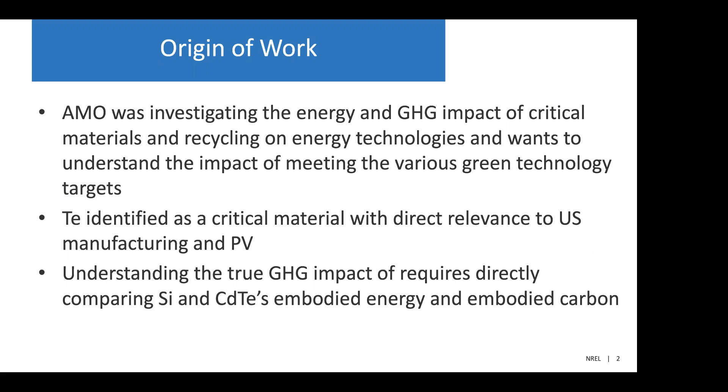And so that's kind of the basis of where we got started and the lens we were doing this in. And as we like to say, this makes a really good marriage between analysis and science.

All right, I already was throwing out some different vocabulary, and I have to confess, most of my work is focused on embodied energy, embodied carbon. So I was like, of course everybody knows what this is. Turns out, for those of you who do not live and breathe this, it is not necessarily intuitive.

So embodied energy is the energy consumed to mine or harvest all the way back from raw materials to a finished product. This includes things like transportation. Same with embodied carbon. Embodied carbon is the CO2 released starting all the way back at the mining of the raw materials through the transportation of a finished product.

Now, when you're talking about these things, you are often talking about analysis called LCA, life cycle analysis. And you will either do that from cradle to gate. Cradle to gate is from mining extraction to the end of the manufacturing of that product. The other way the analysis is often done is cradle to grave.

Going cradle to grave means you start at the mining or the extraction and you go all the way till the end of the life of the product, and that product has been disposed of, recycled, or found a second use. For what we're going to do, it's going to be cradle to gate, but that just sets the parameters of how we're looking at this.

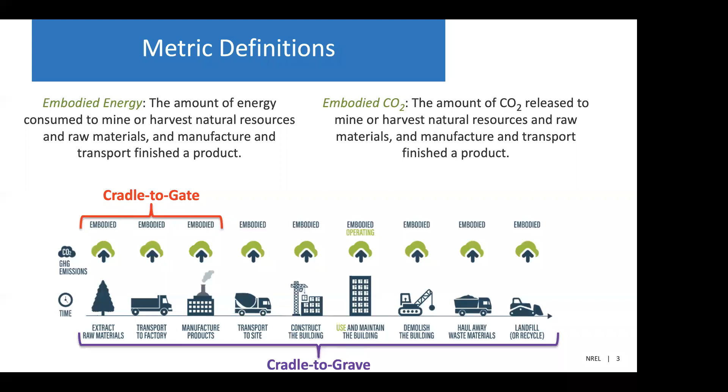Continuing to give a little bit more background. So the tool that we're going to use to do this life cycle analysis for our project is called Material Flows through Industry Tool. This is a tool that the Advanced Manufacturing Office has been funding for over a decade. And it is based, if you're just doing the defaults, on the U.S.

Energy Grid averages. And you essentially put a recipe for whatever you're wanting to manufacture into it, and it can then generate what is the embodied energy or embodied carbon to manufacture that recipe. And it has a big database behind it. And that is the tool we are using for our calculations.

Then, just to iterate for this group, it is a free tool that you can use. The current administration focus, and a lot of the new funding opportunities coming out, are starting to talk a lot more about decarbonization, embodied energy, and whatnot.

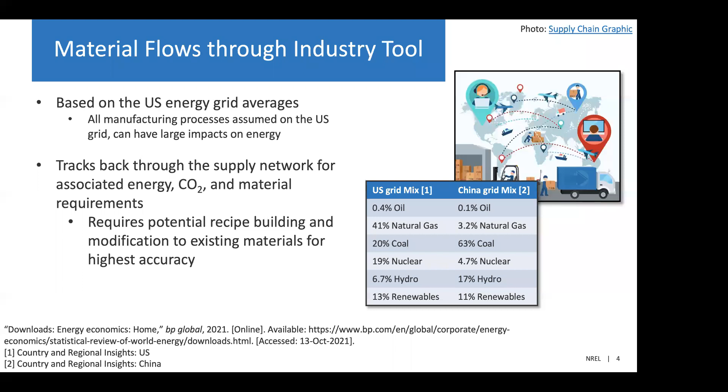So this is actually a tool. You can Google MFI NREL. It'll take you to the website. You can sign up. And this is a tool you can use for your own projects if you want to be able to get an idea of what these are.

All right. So going a little bit more to what was the project, we decided to use as our model cases silicon PV and CdTe PV. And so we consulted with different experts to get an idea of what is the current state of the art. We thought that CdTe makes a really good approximation for almost all thin film PV, as it's a superstrate technology grown on glass with a TCO.

So since today we're talking to people who are interested in perovskites, while obviously there are differences between CdTe and perovskite, for the purposes of this analysis there should be a pretty close approximation of what the embodied energy and embodied carbon, initially at least, would look like.

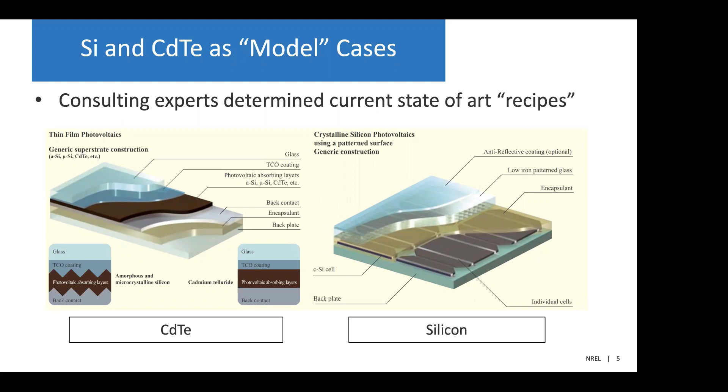All right, so how did we get going on this? Our first step was to do a fairly comprehensive literature search, pulling values that other people had done, because it's not like we reinvented a wheel and nobody had done a life cycle analysis before. And so we wanted to make sure that whatever we were doing was in line with what had been previously reported. So we, for both CdTe and silicon, pulled the literature values.

And then we went and got the latest recipe. For CdTe, it was the latest design from First Solar for their Series 6 module. And then for the silicon, we got a bifacial recipe from a Key State lab, and in analyzing it, we think it's a close approximation to the state-of-the-art LONGi module.

So once we have that, we put it into MFI. And when I say we, I actually mean Hope. Hope did all the LCA analysis for all of this. And so this is the royal we. And then we looked at our values compared to what we were seeing in literature, and that's what you're seeing here.

And again, I'm going to highlight we were doing cradle to gate, so we only looked through the finished manufactured product. And you can see, obviously, our values are a little bit lower than some of what was in the literature, but we are also at least 3 years newer, so we're using more state-of-the-art, and a lot of things have changed. There's been a lot of material reductions and other things.

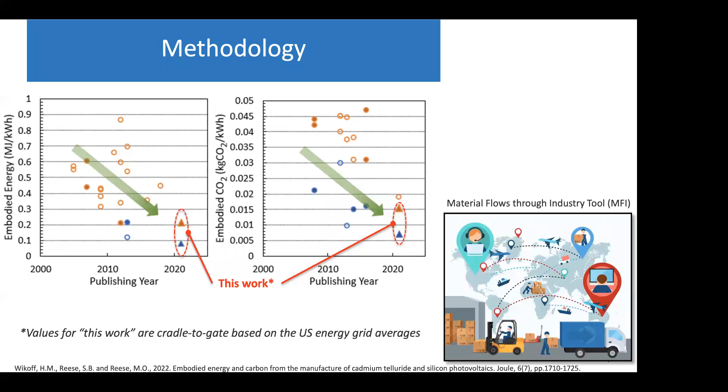So we felt fairly confident that we were starting at a baseline where there was nothing crazy that we were doing. We were confident in our tool, confident in our recipes. And so starting from that standpoint, we ran the numbers. All right, so energy payback times. It turns out one of the things we found when we were looking through literature, energy payback time is a favorite way of comparing technologies. And so we wanted to figure out the energy payback for a CdTe module versus a silicon module.

Now, I want to take a moment and caveat this. We understand energy payback times are more typically for a system. In our case, though, what we did is we just modified, and this is the energy payback time to manufacture that module. But we do understand typically this is more of a system sort of equation. But if you read through a lot of different papers, a lot of people report on an energy payback time of modules alone.

So what we found is that energy payback time of a CdTe module is about 2.5 months. What does this mean? That means that you make this module, you get it out in the field, and after the first 2.5 months, it has generated the energy that had been necessary and consumed in order to manufacture it. That means for the next 29 years, 8 months, and 15 days, all the energy it generates is in excess of what it had taken to manufacture it. A silicon module took closer to about 6 1/3 months to have an energy payback.

One of the things that we were surprised to see is the semiconductor for a CdTe module is only about 1/3% of the embodied energy, whereas if you look over here at the silicon, it is closer to 5 months. And I'm actually going to turn it over here to Matt to talk a little bit more about some of the other technical things we came across here.

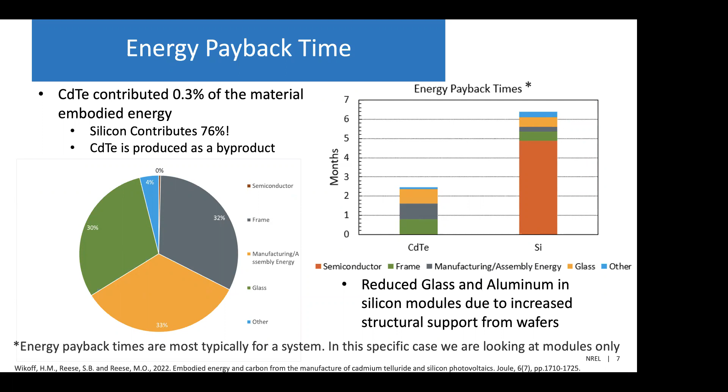So, yeah, as Matt noted, in a thin film module, a third of your energy is the glass and a third of your energy is in the frame. So from a perspective of potentially decarbonizing a thin film, there are a lot of other areas that are going to be just as impactful as tackling the module manufacturing itself.

All right, so going back to what the project's original mandate was, we wanted to then look at recycling. Now, first, I know there is a lot of excitement about recycling PV modules out there, and I share it, and I think this will be great.

Nevertheless, the question actually came down to, is it reasonable to recycle CdTe modules in order to recover the cadmium and the tellurium as a critical material and reuse it into another module? And using the same methodology I described, we were able to ascertain that if the only thing you recovered from a recycled module was that cadmium telluride, you would only have a minimal bump in the amount of energy it took to manufacture that module.

Now, however, if you've already collected the module to recycle it, it's super trivial for you to go ahead and strip that aluminum frame and recycle the aluminum. And so if, in addition to cadmium and the tellurium, you go ahead and recycle that aluminum frame, then you actually are going to use considerably less energy than it took to make it out of all primary materials.

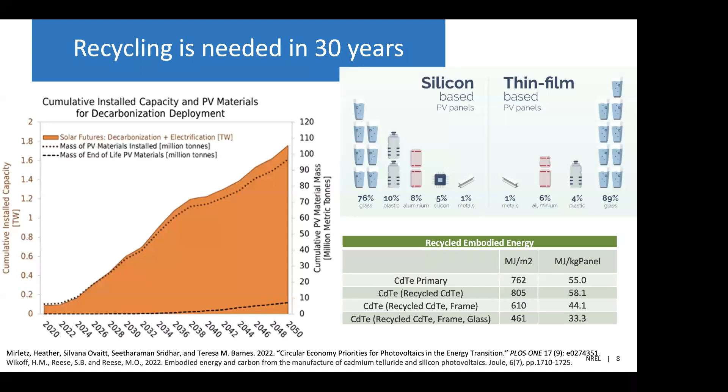So going back to that energy payback, we had been able to get a couple other ideas of what the amount of energy to manufacture a CdTe module would be. Same with silicon. The energy to recover the aluminum frame of a silicon module or the glass of silicon is going to be the same. We then wanted to look at the energy payback as you are able to use more and more recycled materials.

Something we learned, and it was kind of eye-opening to us, is that in the way energy payback is defined to be calculated, you actually put in a grid efficiency, which is the primary energy to electricity conversion on the demand side. And so this counterintuitively means that as the grid goes to a higher renewable penetration, the energy payback calculation will mean that it'll take longer for these renewable technologies to pay back.

So currently we're in the upper left-hand corner with CdTe, and as we come down to using all recycled material, but the grid efficiency goes closer to more renewables, the energy payback time will be somewhere between about a month to upwards of 5 months if we had a 100% efficient grid, which was never going to be possible, but we will get closer. Matt, anything on energy payback you want to tackle here?

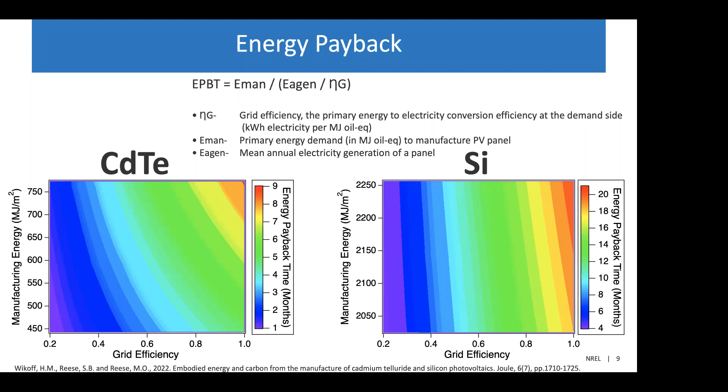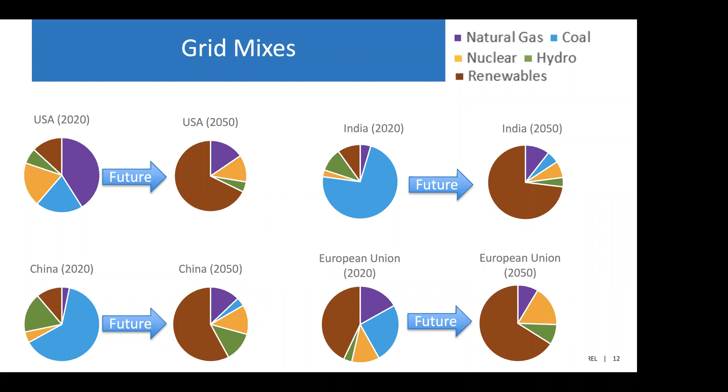All right, so using these grid mixes, we went ahead and ran the same analysis that we showed before, looking, though, at the manufacture of these technologies at each of these locations. So manufacturing CdTe in Europe, US, China, India, same with silicon. And as you can see, the difference between CdTe and silicon is about 2x lower when you have the same mix, and the mix can then change each of those amounts by about another factor of 2x.

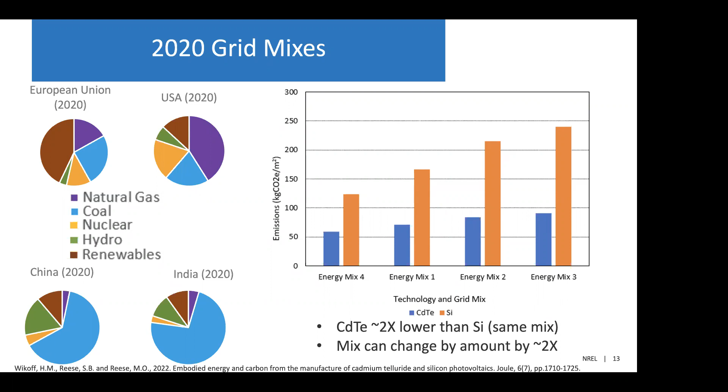Okay. So I started off our talk today talking about all this embodied carbon. I'm sure all of you have been hearing about embodied carbon, but why do we care? As we were bantering back and forth, Hope came to us with the results and said, look, it takes this much carbon to make a CdTe module. All right, great. But now, what does that mean? What is this amount of carbon? And so, where do these carbons come from? It's based on the carbon budget.

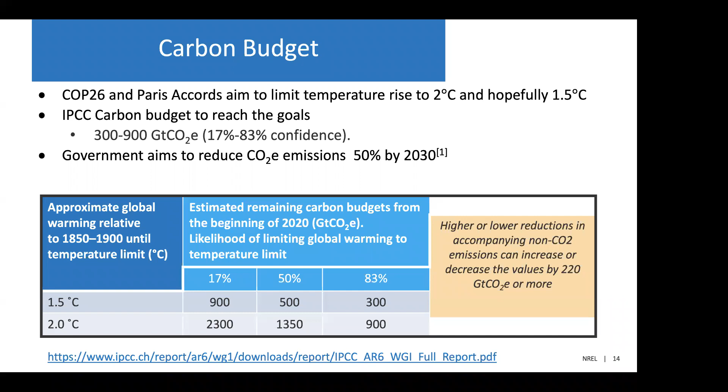With COP26 having been recently, the Paris Accords, the goal is to limit a temperature rise to 2 degrees C. Ideally, in a happy world, we'd keep it to 1.5 degrees C. And so the IPCC has a carbon budget with confidence levels that this will actually happen. The IPCC has calculated with 50% confidence that if, starting at the beginning of 2020, we only generated another 500 gigatons of embodied carbon, we would be able to limit the temperature rise to only 1.5 C. So what we want to do is take the values we calculated for each of these panels and put them in a, okay, what does this mean sort of analysis. And that's what we've done here.

So what does it mean to manufacture 1 terawatt of the PV technology on these different grids? What you can see here is manufacturing a terawatt of silicon on India's grid in 2020 would result in generating 0.1% of the 2 C IPCC 50% confidence budget. However, when you go to what their 2050 grid would be, you are instead going to be at 0.1% of the 1.5 degree IPCC budget.

Also, again, going to the what does this all mean? Because as we were staring at these numbers, we're like, okay, what is that in relation to? If you look at the very top of this graphic, the green line is the emissions from 2019 US electricity generation. So the good news is a terawatt of PV manufactured on any grid is still less emissions than what we had in 2019 to generate our electricity. However, as you see in the EU, in 2050, manufacturing either a terawatt of silicon or a terawatt of CdTe puts you under the 0.1%.

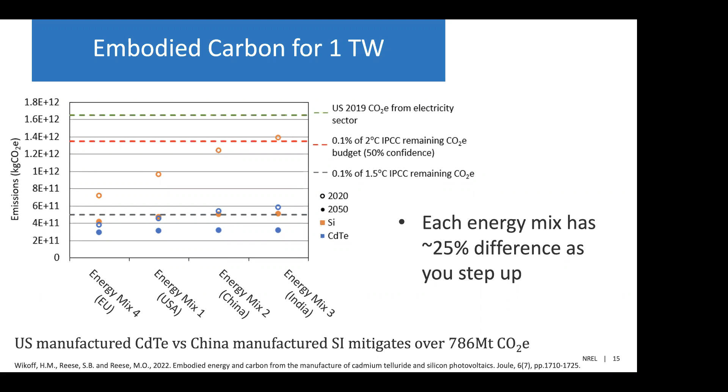All right, what are the implications of this? So one of the questions we've always been asked is, when we're graphing this, why did we choose a terawatt? Because it's easy. You can multiply a terawatt however you want and get whatever values you want. So we chose a terawatt for that reason.

So what we did is we pulled out a couple more papers to get estimates of deployment of PV by 2050. And of course, it varies anywhere from about 7 to 70 terawatts. So to put things in context, to meet these 2050 deployment goals, if you assume all silicon PV is produced on the 2020 China grid, you are going to consume between 2 to 17.5% of the entire IPCC's 1.5 degree 50% budget. Now, I want to note, this is for modules only. We are not including racking, inverters, or other balance of system things.

If you assume that you deploy 100% CdTe produced on a 2020 US grid, you will consume between 0.6 to 6.3% of the IPCC's budget. Now, we are not saying we should stop producing silicon. Absolutely not. Like you saw the green line, the electric emissions from the US in 2019 are way above a terawatt of PV, no matter where you produced it and what your technology was. It is just to give a relevance of where we should focus on trying to decarbonize this already green technology. And to reiterate for this audience, we think emerging thin film PV perovskites would be on par with the CdTe.

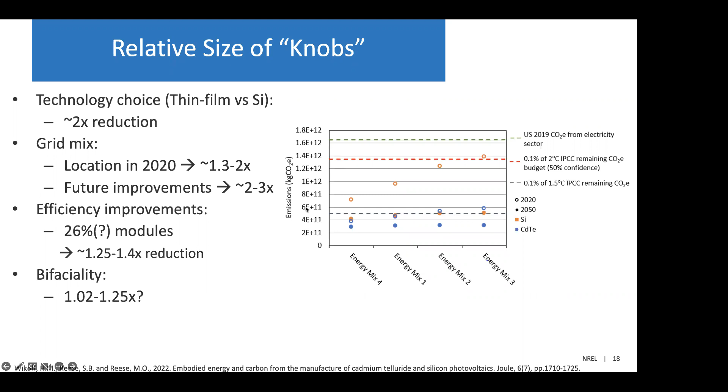Also, after we did this analysis on a Series 6 module, First Solar recently announced a Series 7. In the Series 7, they have reduced the amount of aluminum, going back to a frameless module with just 2 aluminum supports down the center for mounting to the rack. So they are reducing the embodied energy further. I don't know exactly what they've done to change the thickness of the glass. There's clearly a trade-off there.

They've also been looking into things like having different thicknesses of glass on the edges of their utility installations versus the center, where you have different wind loading events. So there are a variety of things you can do to try dialing those knobs. And again, iterating on the glass is an important piece for thin film. In the case of CdTe, that's 52% of your emissions. With silicon, it's a lot less, only 18%, because in silicon the semiconductor is a significant contributor.

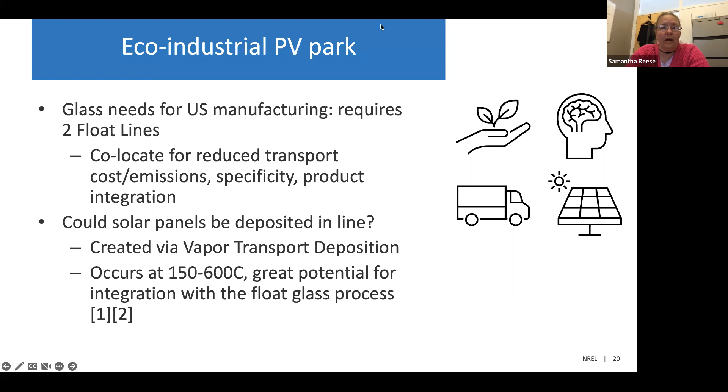Hope and I's big thought is, if the US is going to grow, especially since we have such a dominant position on CdTe manufacturing, we're going to need to create at least another two float lines for our deployment. So what if you co-locate the glass manufacturing with your panel manufacturing? Instead of heating up the glass, cooling it down, and heating it back up again, you just keep going and reduce your energy there. These would all have opportunities for reducing.

Yeah, but a lot of your energy is still going to come from how you make that module package, the lamination and whatnot. But potentially if you could move away from glass with a low energy flexible product that has a barrier, that may be an opportunity for perovskites. Yeah, you still need those very good barrier properties that the glass has, but in different materials.